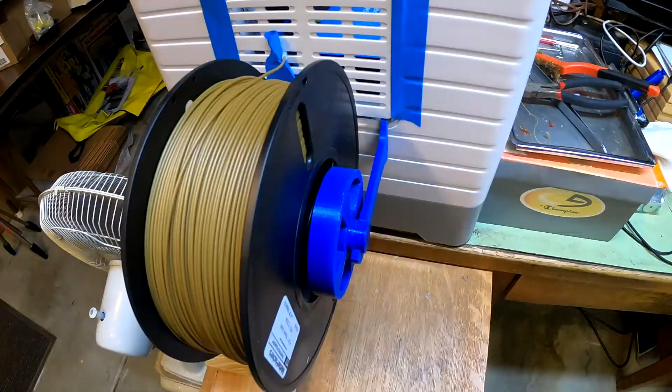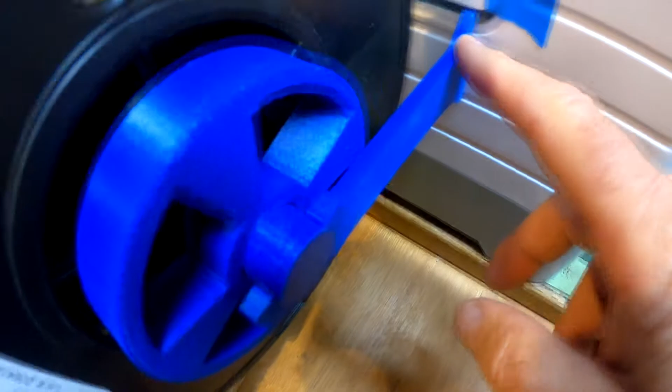Here's an update on our side loader. A while ago I bumped into it and cracked the little hook here on this one, so I was able to re-glue that one, and that's staying in there okay. But then today the one on this side cracked, not because I bumped it, just because it was getting weak.

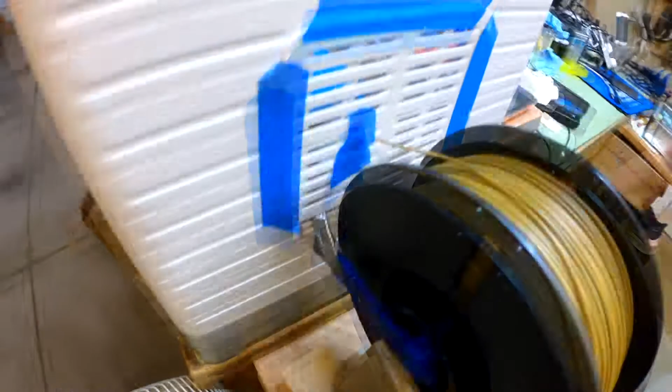So for this last print I was propping up this side with this. We're going to be reprinting these and redesigning them so they're stronger. So here's this little hook here - the distance between here and here at the apex of the hook is where the most stress is, and that's a very thin piece of plastic.

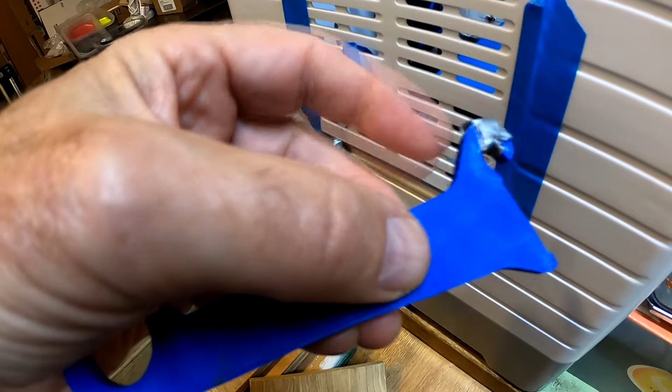So it would have been better if the design had pulled this slope out a lot farther, made this thicker. So we're going to do a quick and dirty fix to this design. The guy who posted it on Thingiverse didn't post any CAD files, just the STL.

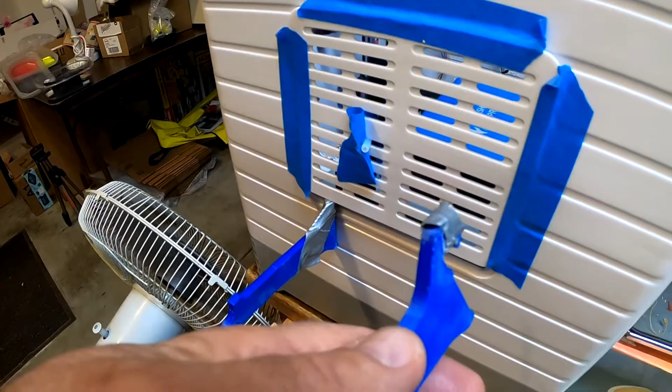So we'll just be modifying that using 3D Builder and make it stronger for the short term. In the long term, I have a much better idea about how to do this side mount. Since we're going to be printing as much as possible with 1 kilogram reels, we need this to be solid and not breaking on us. So that's the next project, and then we'll go on to our regular printing.

So here's our part. It hangs off the side of the printer, as you've seen. We're going to do a quick and dirty fix on this to make it a little bit stronger. The weak point is right here - this little area here has all the stress on it.

This part, you know, it's a cool part, but if you put a much longer web on this side, it would be a lot stronger. I don't know why he did it like that - save material, I'm not sure, but in any case, we need to fix that.

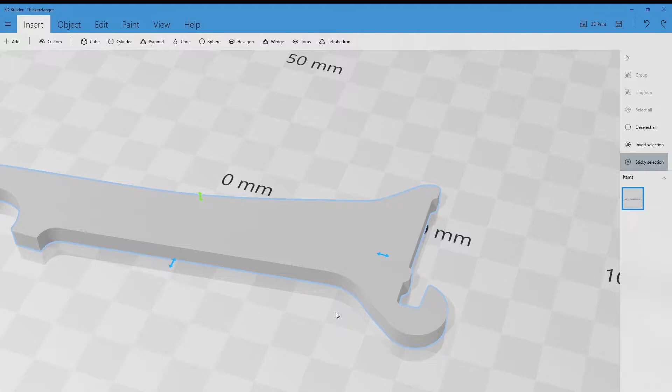So the simple thing to do would be to just increase the width like that. And that's fine, except now this indent here is too wide because the axle has an indentation that's only 5 millimeters wide.

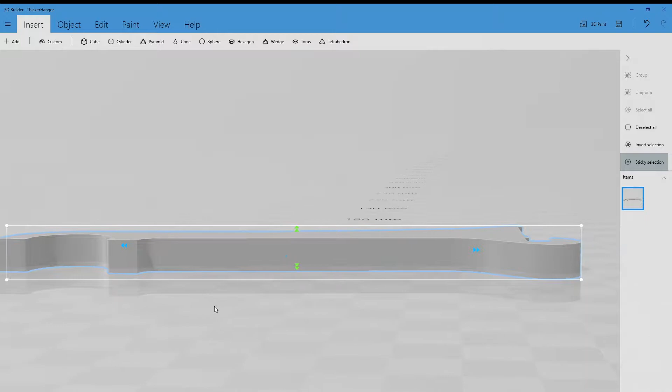So what we're going to do is we're going to leave it like that for a second. Then we're going to insert a cube, and we're going to make the cube 120 in all directions. And then we're going to change the thickness to just 10.

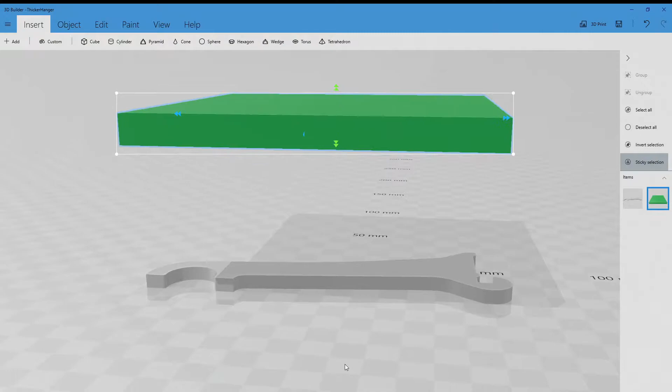And then we're going to drag this down, drag it over, drag it down so it touches - see, it'll lock into place there. So now it's touching the top of the other part, and you can see that this part is exposed and the rest of it is covered up.

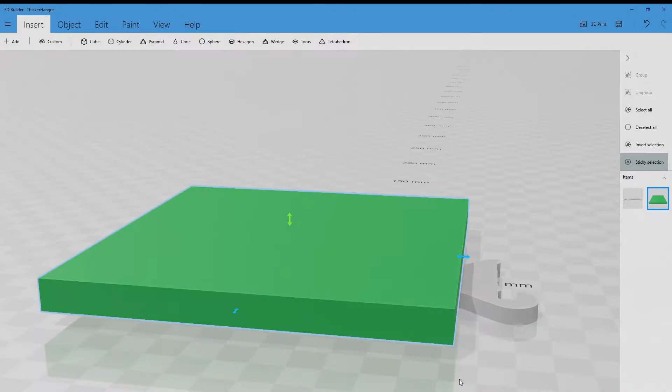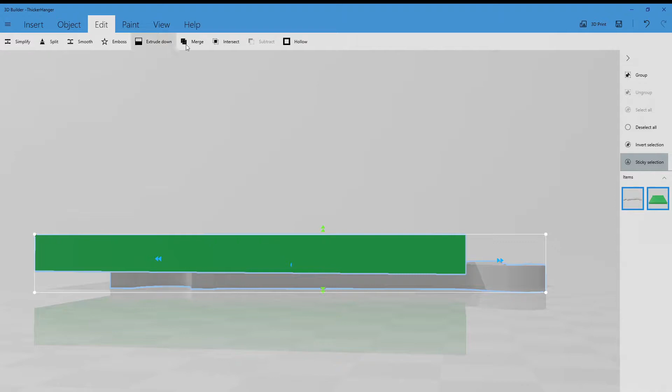So now we're going to go back to the part itself, and we're going to change the width to 7.5. Okay, and then we can subtract the cube - it's not really a cube anymore, but subtract the cube from this part, and oops, we did not touch that. Yeah, and now we've got this. So now this is 5 millimeters again, and this is 7.5 over here.

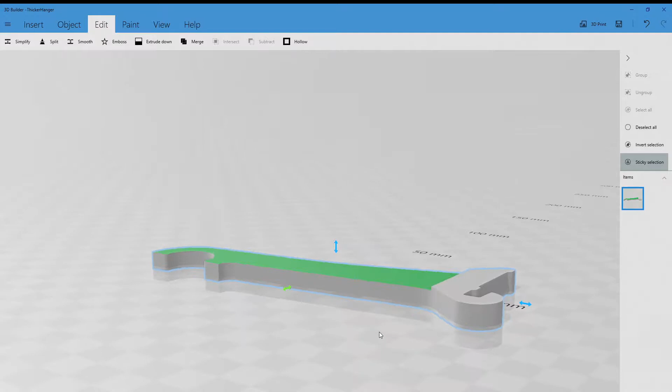So that'll automatically make this stronger because it's thicker. But I have some ideas to make a much better design, I will work on that later. But so we have this little perpendicular thing here, so we want...

...to put a slope in here. So let's see if we can get another cube and do that. Okay, we want to slope this little drop off here so it prints more strongly. So we're going to add another cube, and we're going to change the pitch to 45.

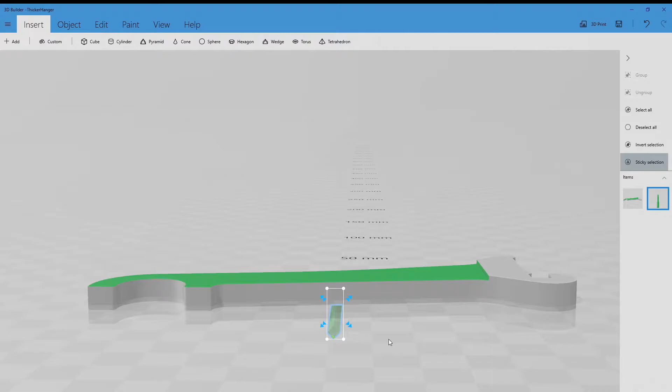That'll get us going in the right direction. And we'll change the size to 2.5 in all directions to start with, and then we're going to change the Y to about 50 - doesn't really matter. Then we're going to move this up and slide it over, and we've got to get it so that the angle on this thing, the point, just touches the part.

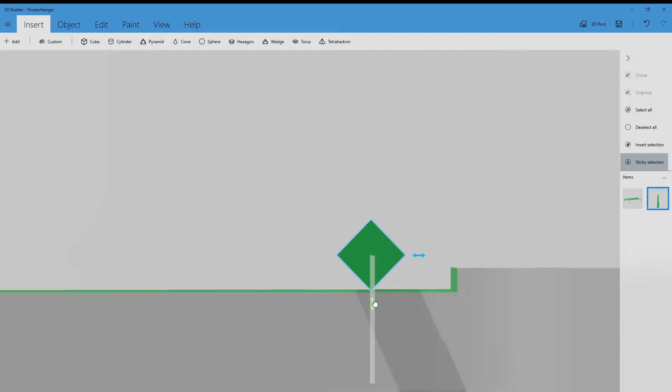For some reason it doesn't click at that point, just have to eyeball it. That looks pretty good. Then we need to come over here and get the point right at the drop off there, the base of the drop off.

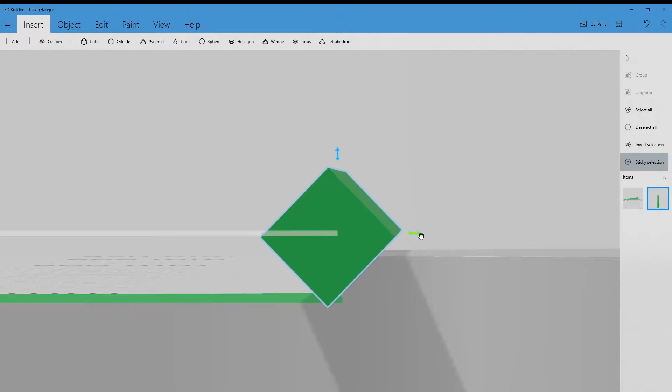Looks like it's a little bit high, move it down a little bit. Still, it's not far enough to the right. Okay, all right, that looks pretty good.

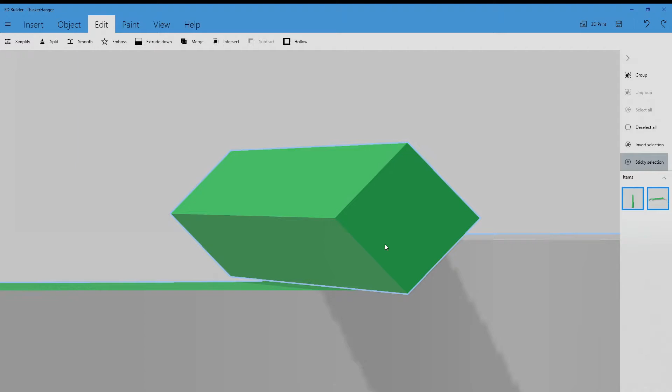Now we'll subtract, and we should have a nice little slope here. It looks like we missed a little bit, so we'll try it again - it needs to go down slightly. Try subtracting again - a little bit more. That's a little bit too much.

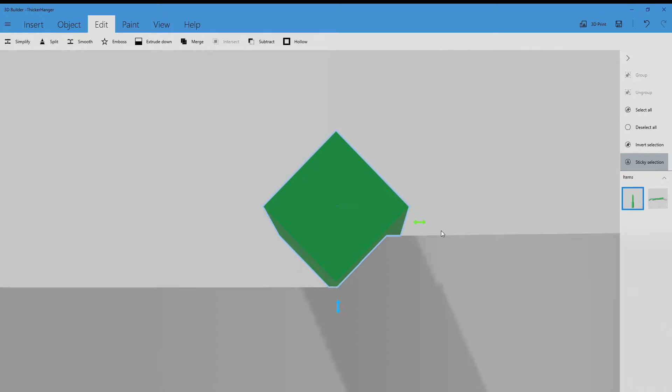Let's try that. I think that's a little too low. That looks good, good enough for government work. All right, so now we have a stronger joint here. Whoops, don't want to do that.

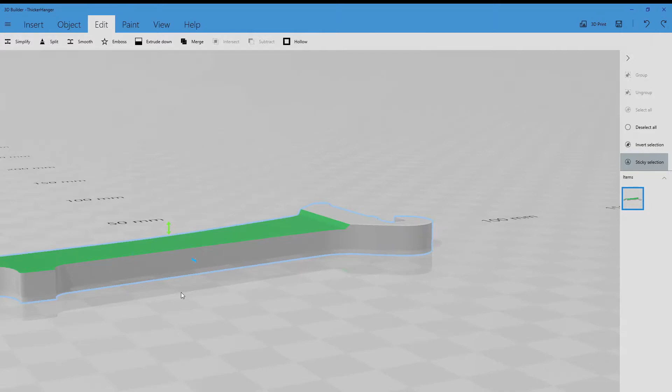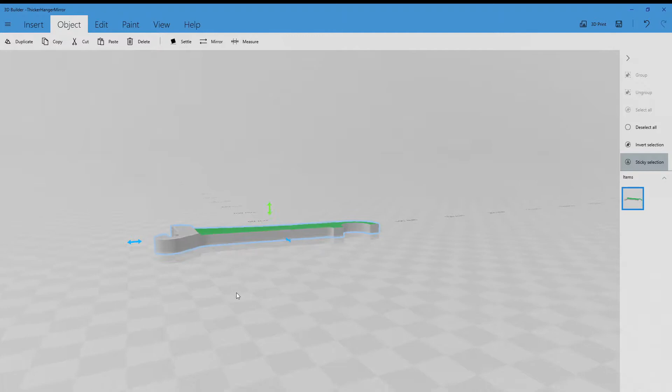Stronger joint, and we have the same 5mm thickness over here, so we'll save that. Now we want to save it as the mirror, because we want one for each side. There's a mirror function - you can do object mirror, and that will mirror it so we'll have this little indentation thing on the outside of the reel on both sides. So this will be the mirror image version.

All right, so we just need to print that up, and we'll be back printing with big reels again safely.

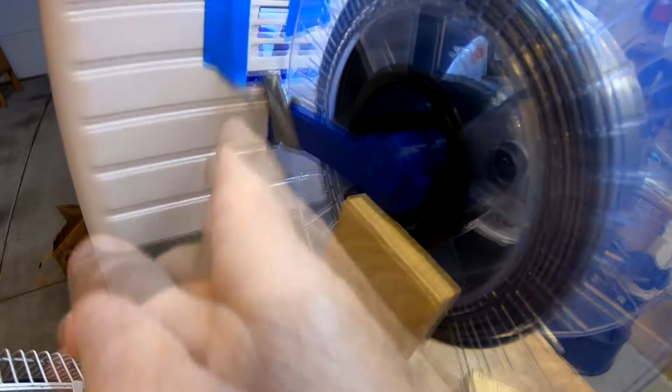Okay, we're ready to go. We're ready to print our new arms that are going to be stronger. This area will be 50% thicker. And we've got our jury rig set up here. We've got our wood brace on this side, because this side is weak - the glue didn't really take on that side. I'm using my silver HQA PETG, one of the first PETG I bought, but unfortunately HQA stopped making filament, so I'm not buying it anymore, obviously.

All right, let's go to the time lapse and see how it comes out.

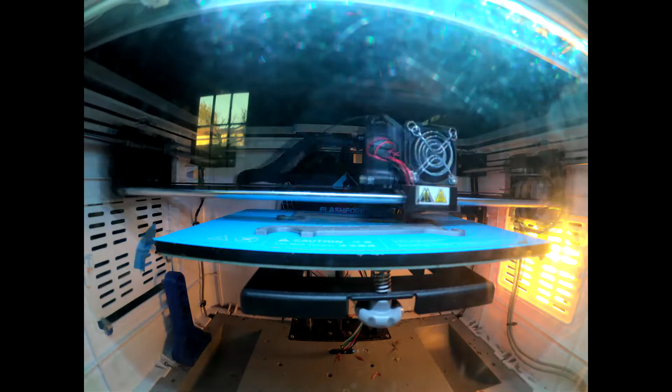Let's see how it turned out. Looks pretty good. I think 80-degree bed temperature worked well to keep it solidly on the bed. A teeny bit of stringing here and there, but that doesn't really matter for this part.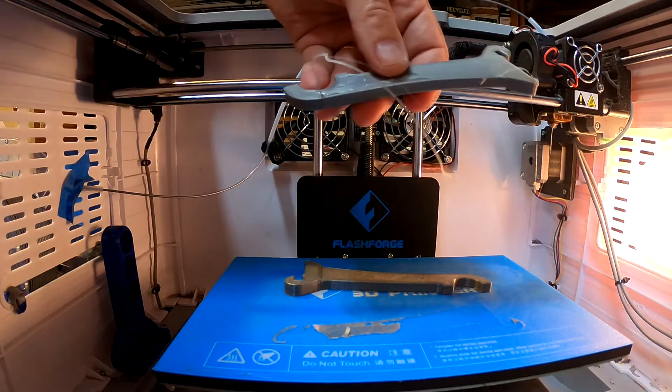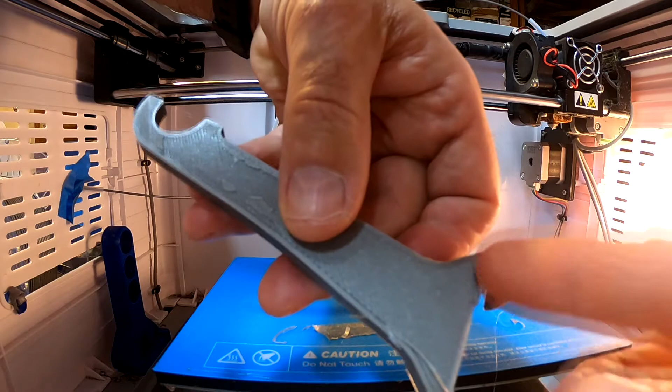Well, we did lose some - 80 degrees was too hot. Yeah, okay, for this part it doesn't matter. We end up stripping off some of the base of it, so that's okay. But you can see this is very thick now. So here's the little weak point right in this little corner here.

So we're going to compare that to the one that's on there now and see how this one is better. I'll get the other one off and clean this up, and then we'll try it on the printer itself and see how it turns out.

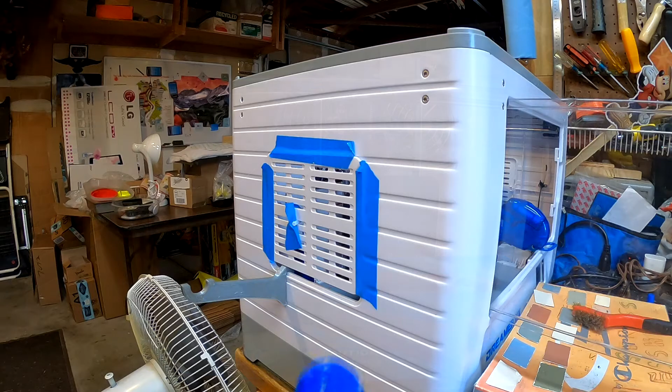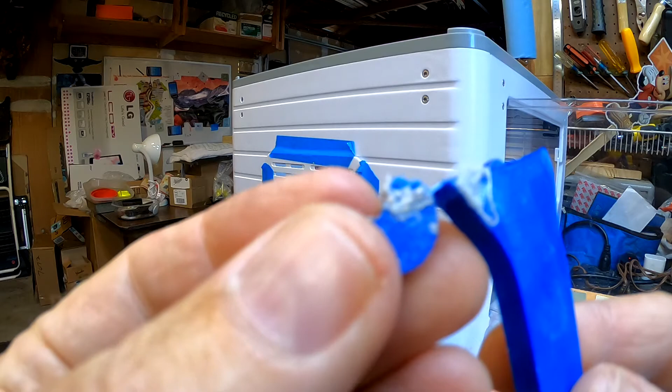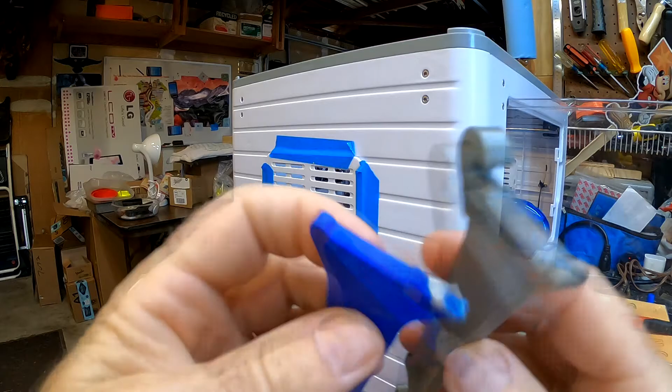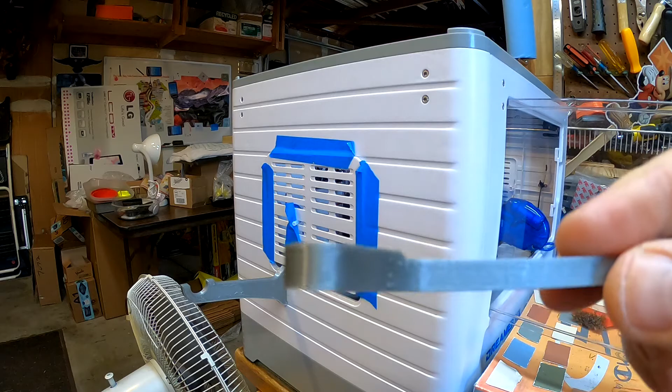Okay, well, we dodged a bullet because we were able to print these new ones just before the old ones completely gave out. You can see this cracked right here. So that little joint there is just too narrow. It's just too narrow for this width anyway. So the width down here is the same, but up here we beefed it up by making it thicker. So this should work a lot better.

Like I said, I have an idea for a much better design that'll actually bolt onto this. I saw something on Thingiverse that replaced this whole piece here with a bolt-on system. That'd be a lot stronger, although this seems pretty strong now. Of course the other ones seemed okay when I started too, but this definitely feels more substantial. So the HBA PETG did a good job of this.

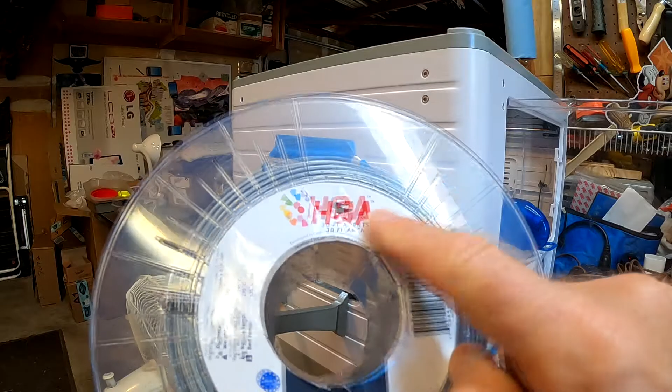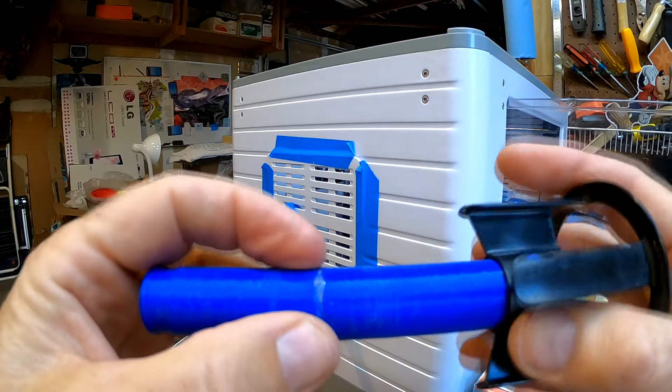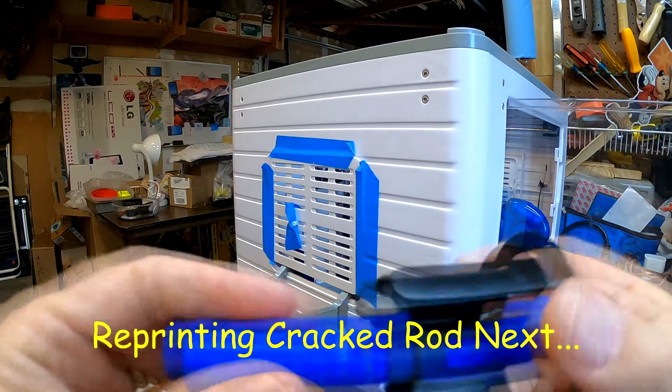Again, HBA is not selling this anymore, but PETG in general I think is a good alternative to ABS. This became a little bit brittle - in fact, when I knocked it off, this rod broke too. I glued that. This is one of the first things I printed. I probably could have printed it with more infill or more solid layers, something like that. So, you know, this was early on in my learning process.

But I think we're good to go for now, and we're off to print some more Mandalorian coins.

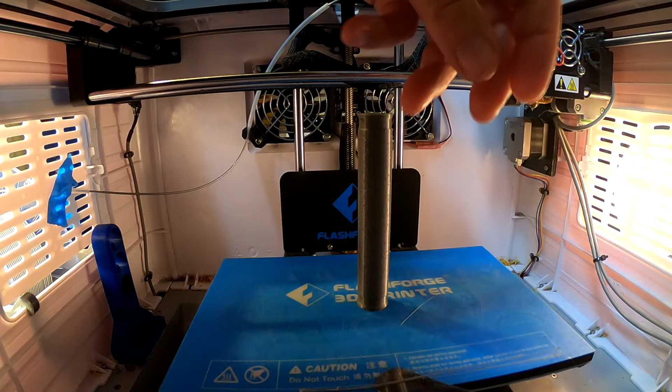Looks like it turned out excellent. Out of the way - nice solid structure, good bed adhesion. Also a little teeny bit on the bottom, but it's not going to affect us.

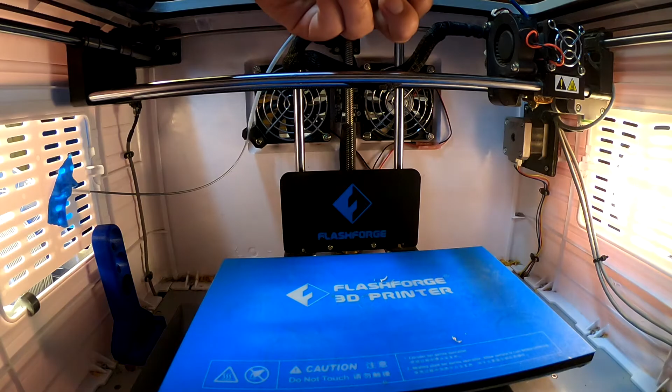Seems strong. I'm not going to push it too hard. Shouldn't have much stress on it, just have to hold up the weight of a reel, so let's try it out.

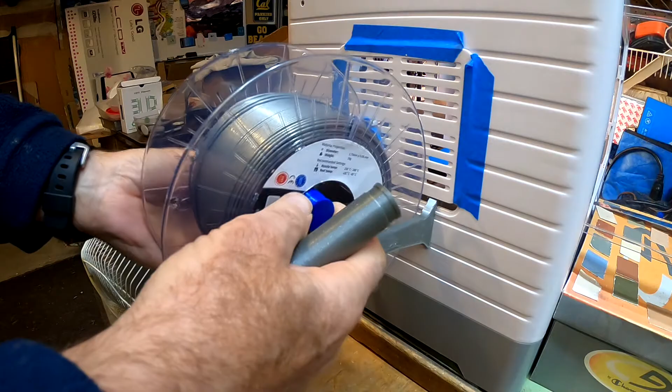All right, here's the existing reel with the existing axle, so we're going to get rid of that. I'm going to put this one in. Hold on, get a little closer together. And we still have a little bit of play here, so we're going to want to use these spacers. That's okay.

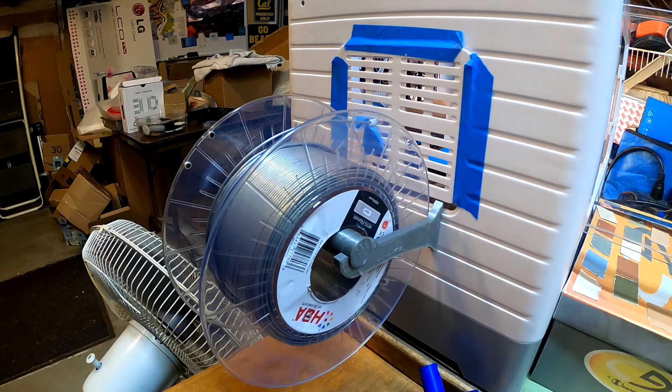All right, so this PETG is nice and slippery, so I should have no problem rotating on this. But we're going to want to use - even though I printed the smaller ones, it's about 10 millimeters less than this - it's still a little bit too wide, at least for this reel, so we're going to have to use the spacers on here. That's no big deal. Okay, that's a call it a success.